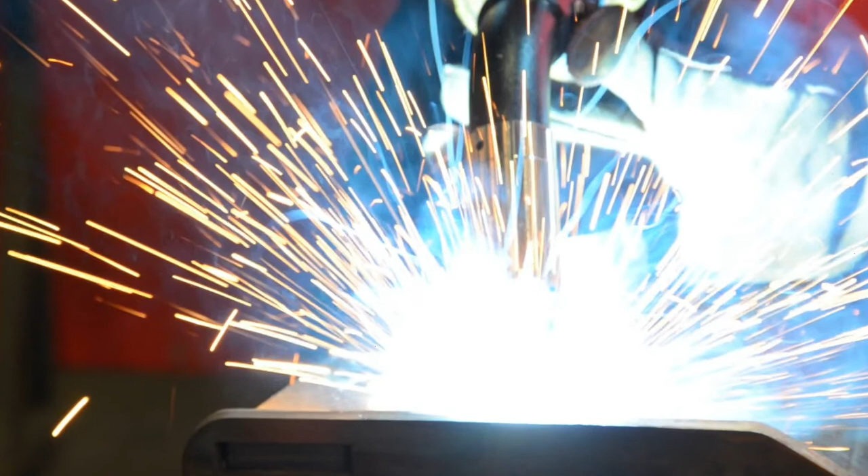Breathe Freely in Manufacturing focuses on welding because of the combination of a significant hazard and a wide range and number of people potentially exposed to the welding fume and gases.

We estimated that 190,000 workers undertake welding across the UK and Northern Ireland, ranging from those employed as welders and spending most of their time welding or preparing to weld, to those who do short amounts of welding for maintenance or repair tasks. Some will be welding mild steel, while others will weld on stainless steel or more exotic alloys with varying toxicity of the metals involved.

We'll consider these more later. The 150 cancer deaths that this document or information sheet provides may be from the more hazardous metals in the fume, or, as recent scientific evidence has now shown, exposure to general welding fume. The number is estimated from the HSE's data, and is for the UK as a whole.

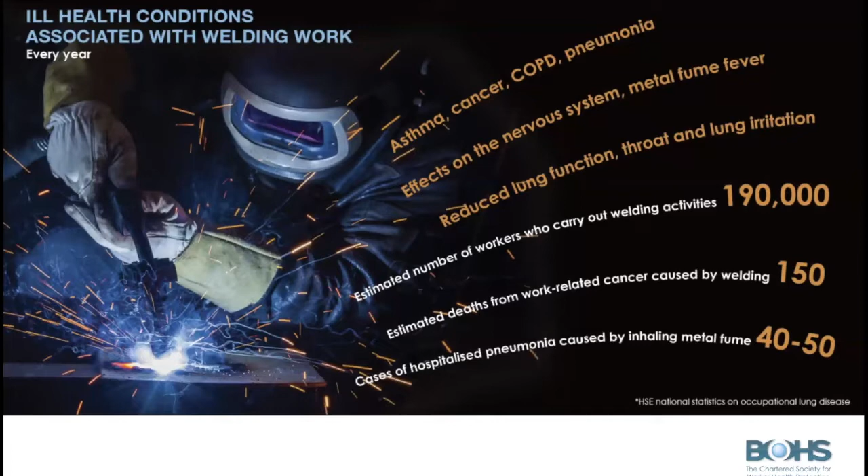The campaign was launched in May 2017 by BOHS. The Breathe Freely 2 campaign follows on from one on construction, which is also ongoing as we speak.

And also a control selector tool for welding fume, which is a microsite that we've developed to help you select the best control options. We'll take a look at that later.

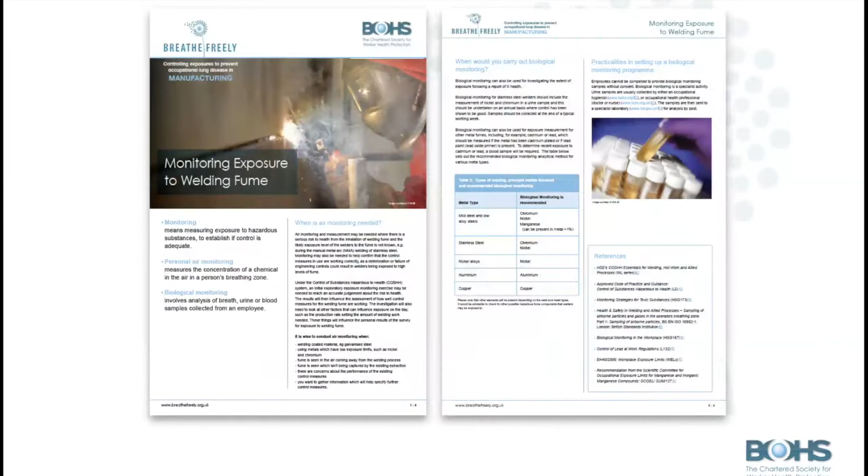Here's an example of a fact sheet, in this case explaining what exposure monitoring is and when it is needed. I'm not going to go through the detail. If you want to take a look, you are very welcome to do so.

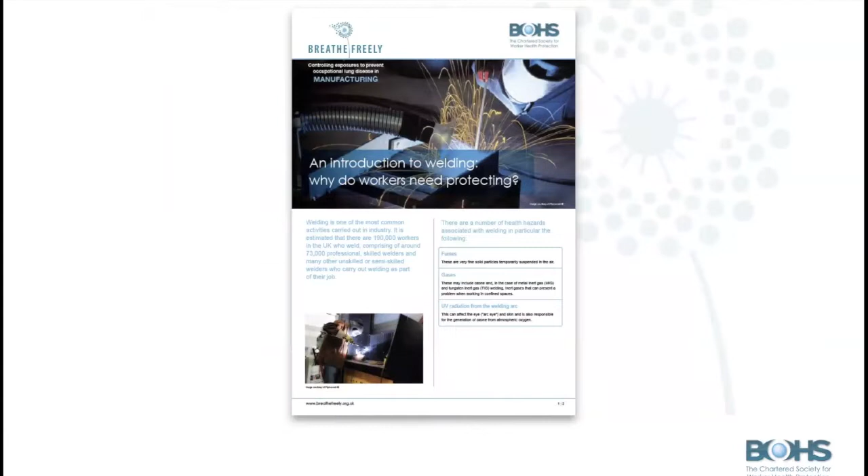And here's a briefing for duty holders, so as you can better understand the hazards and risks, and as a call to action to get you to start taking improvement actions on the welding in your businesses.

This slide takes a look at the likely and most significant components of the welding fume from various welding activities, which may come from the base metal or from the welding rod or the wire. The next slide shows us those of greatest concern.

As you can see down the left-hand side here, we've got different types of materials that you might be welding on, and across the page, the brighter the colour, the more likely you will come across those particular components in the fume. So as we can see, low alloy steel, you might expect to get some chromium and some hexavalent chromium giving off.

Hexavalent chromium in particular is toxic and has a very tight exposure limit. Also, you can see near the right hand side there, manganese, which has become very important for low alloy steel. We'll talk a little bit more about that later.

This is based on the International Standards Organization's 15011, Health and Safety in Welding and Allied Processes. And these are the potential welding fume components of greatest concern based on the toxicity and the prevalence of the welding on the specified type of material.

As I said on the previous page, chromium, hexavalent chromium - chrome 6, chrome VI, as it shows on the screen there - the manganese, and potentially the nickel.

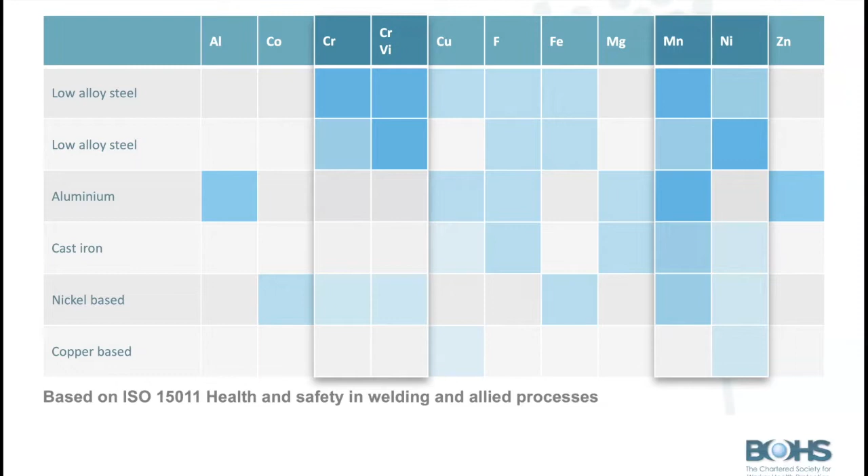The workplace exposure limits for these components are tight or very tight and are likely to be exceeded unless effective controls are implemented. Following a change to the limits in August 2018, the workplace exposure limit for manganese is now as restricted as hexavalent chromium, because it is a respirable fraction that will apply to welding fume.

This is particularly important for duty holders using metal inert gas on low alloy mild steel, because this often involves manganese in the welding consumable, the rod or the wire. Even though it may only form 1 to 2% in the consumable, manganese is more volatile and can be up to 10 times that proportion in the welding fume itself. Therefore, the tenfold reduction in the workplace exposure limit for manganese in August 2018 makes effective control of exposures much more challenging than previously for MIG on low alloy steels, in other words, mild steel in particular.

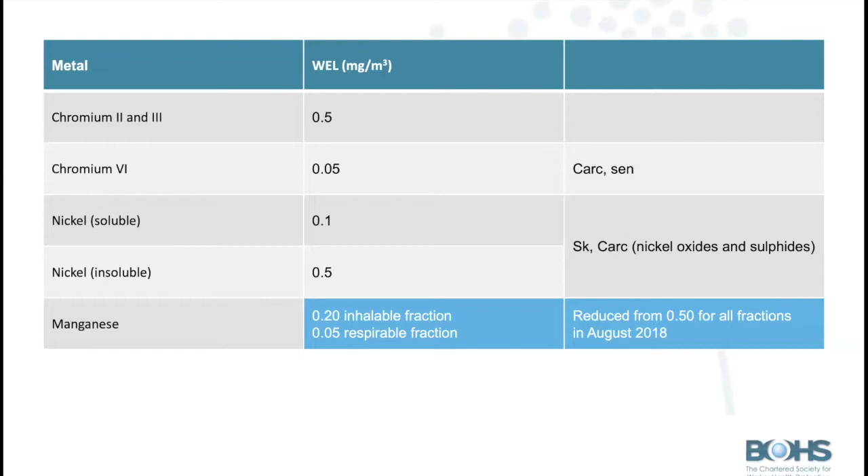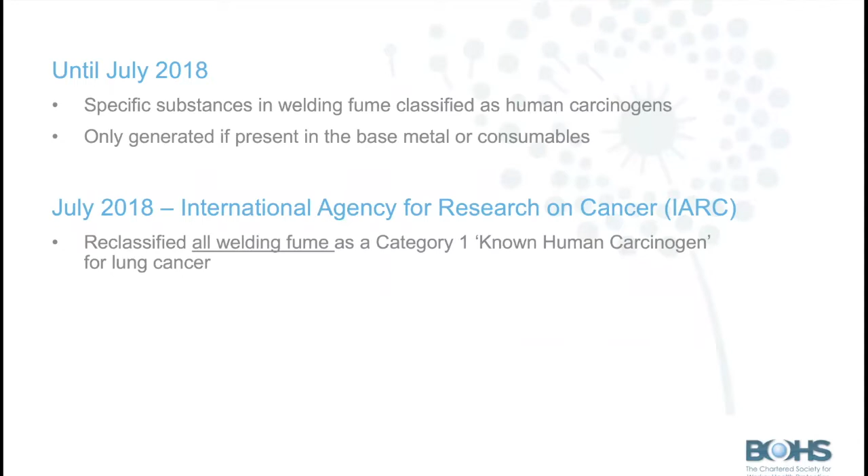But it's no longer just certain components of welding fume that are identified as carcinogens. As a result of an extensive review by the International Agency for Research on Cancer, IARC, they reclassified all welding fume as a Category 1 known human carcinogen for lung cancer in July 2018. There was also some evidence of a link to kidney cancer.

As a result of that, the HSE put out some enforcement expectations. They concluded that the risk had changed so markedly that a safety alert was justified, issued in February 2019. That alert stated that control of the cancer risk will require suitable engineering controls for all welding activities indoors, for example local exhaust ventilation, LEV, which also controls exposure to manganese in mild steel welding fume. Where LEV alone does not adequately control exposure, it should be supplemented by adequate and suitable respiratory protective equipment, RPE, to protect against the residual fume. Appropriate RPE should be provided for welding outdoors, and employers should ensure welders are suitably instructed and trained.

Regardless of duration, the HSE will no longer accept any welding undertaken without suitable exposure control measures in place, as there is no known level of safe exposure. And finally, that risk assessment should be updated accordingly.

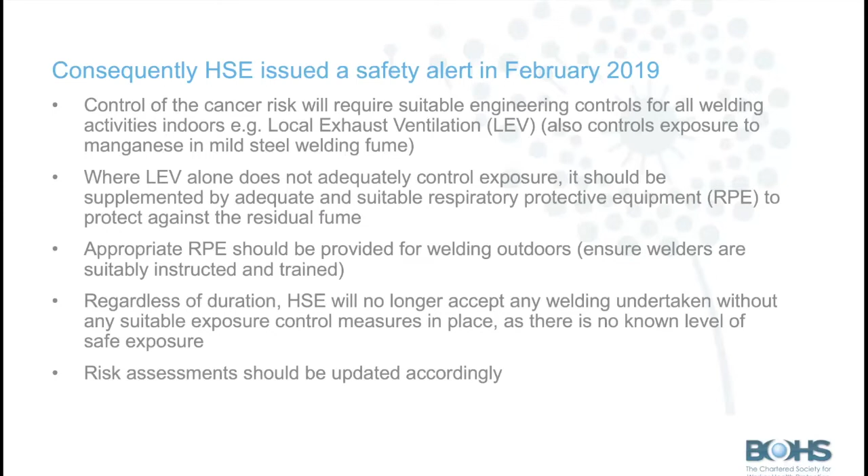This aligns with the HSE Northern Ireland enforcement expectations, which are very clear that control of the cancer risk will require suitable engineering controls for all welding activities indoors, e.g. the local exhaust ventilation we spoke about. Where LEV alone does not adequately control exposure, it should be supplemented by adequate and suitable RPE to protect against residual fume. Employers must make sure all engineering controls such as LEV are correctly used, suitably maintained, and subject to thorough examination and test where required, that suitable controls are provided for all welding activities irrelevant of duration, including welding outdoors, and ensure the correct selection and use of any RPE.

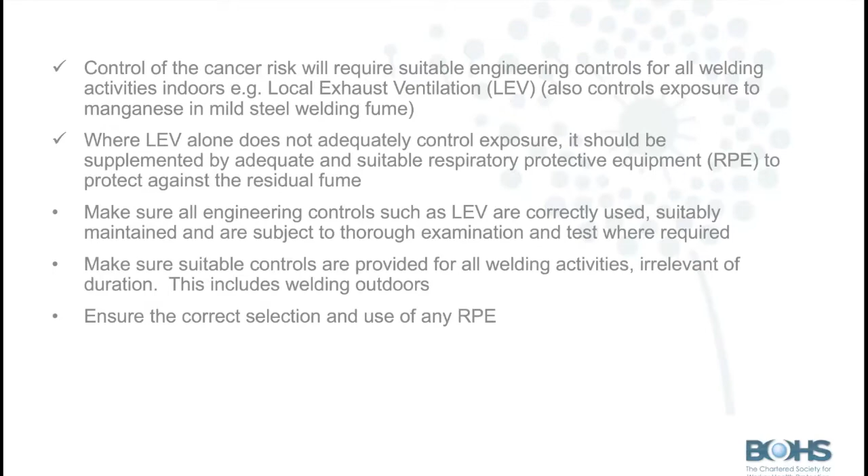So, to elimination: is it possible to eliminate the welding entirely? Perhaps you can use other joining techniques, such as glue. Even for metal-to-metal contact, that is an increasingly possible option. Or perhaps use friction welding or some other technique to join the two pieces of metal together, or design it differently so that you need less welding in the first place. That would all eliminate the need for at least some of the welding.

Is it possible to modify the process? Perhaps instead of doing it manually, you bring in a robot to do some of the welding, particularly on repetitive jobs. That might be both an improvement in productivity, but also will reduce the exposures to employees while they're doing the welding.

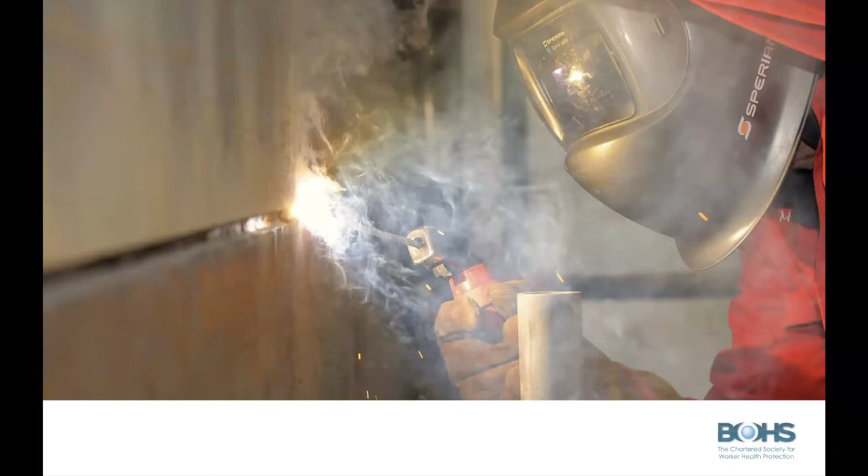This is an example of stick and manual metal arc welding showing fume generation. As you can see, plenty of fume surrounds the welding visor of the welder as the process is underway. The beauty of welding is you can see the fume when it's generated, particularly if there's a bright light, and often the bright light, the arc at the point of welding, actually provides a light that enables you to see what the fume is doing.

Of course, the quality of the weld will always constrain the range of appropriate voltages you can use, and you would certainly not want a poorer quality weld, because you'll need to do it again. There's also evidence to suggest that different welding wires result in different levels and mixes of fume, as does the wire feed rate, the shield gas used, and the pulse arrangement in the current. Unfortunately, these effects require some trial and error to assess the best options.

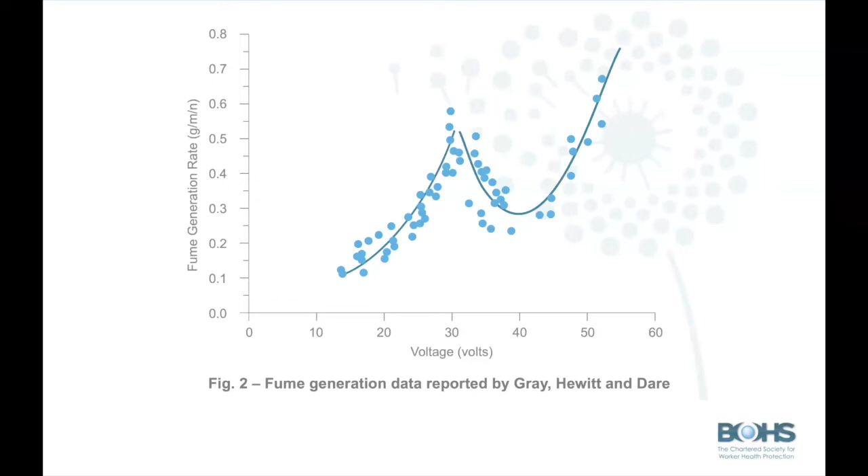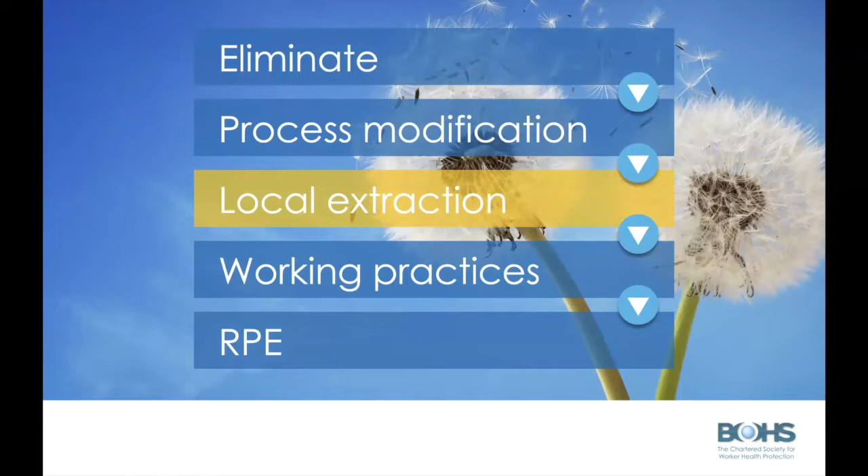What about local extraction? Well, LEV has always been an important engineering control, but following the HSE alert, it is now mandatory for any duration of welding inside, and is also appropriate for welding outside where conditions allow. The following slides provide some examples of what is possible, and occasionally an example of what really isn't working.

So it really does need to be positioned close to the welding point, and so it's drawing the fume away from the welder rather than past the welder, because otherwise it's drawing the welding fume into the breathing zone of the welder before it gets extracted. Flexible arm extraction can be effective, but it really does depend on the welder positioning it effectively and keeping it moving to make it an appropriate control.

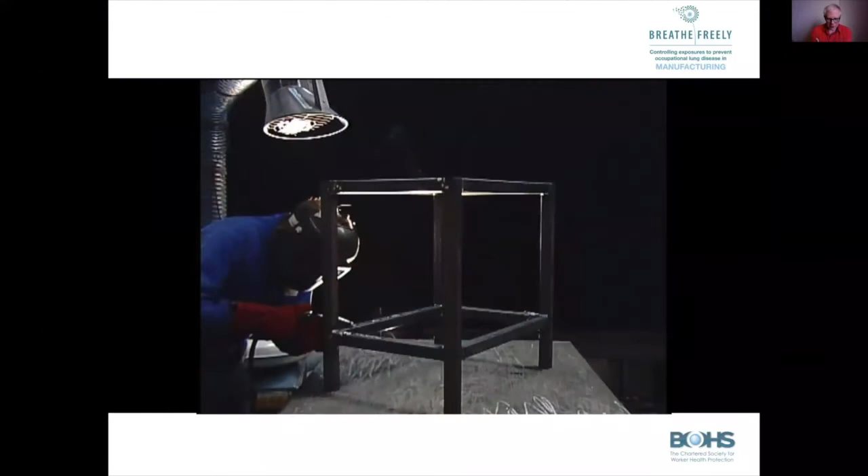We have here a video of a poorly located flexible arm extraction. It's above the welding and the fume rises towards it, and is captured, at least to a large extent. However, the welder is between the weld and the extraction, so all of the fume is drawn across the welder's breathing zone before being removed.

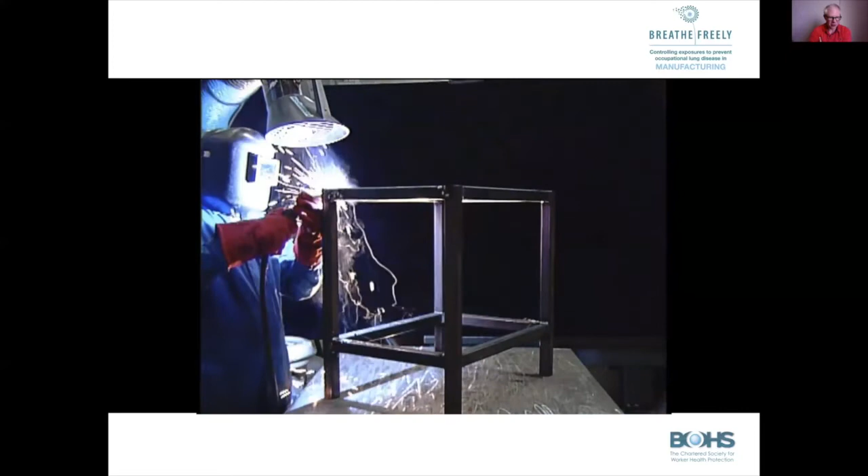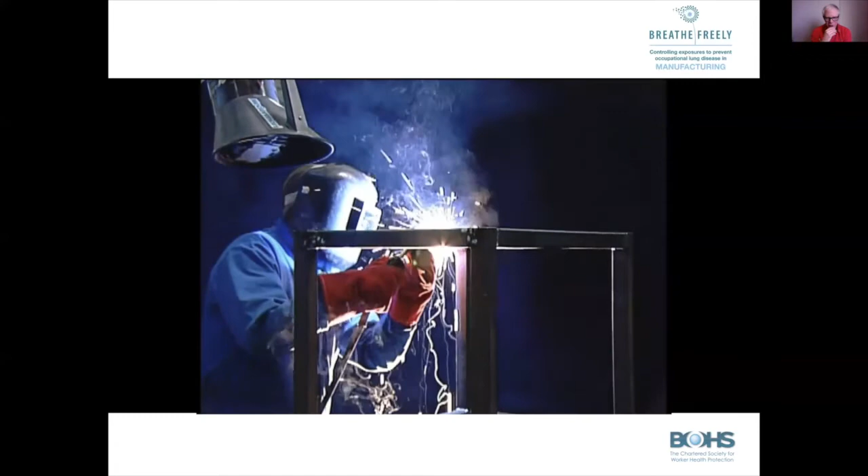When he moves to the top of the frame that is welding, the extraction system draws the fume more away from him - it's no longer between the two. As you can see, most of the fume is captured because it's both closer to the welding point and directly above. Unfortunately, when he moves to the side, he's not moved the flexible arm with him, and the fume is now pretty much spreading out into the open atmosphere in the workshop.

So as you can see, a flexible arm extraction really does depend on where you put it and where you put yourself when using it to be effective. Remember, it needs to be close to the welding point, above the welding point so as the fume rises it captures it more readily, or just behind it, and certainly without the welder between the welding point and the extraction system.

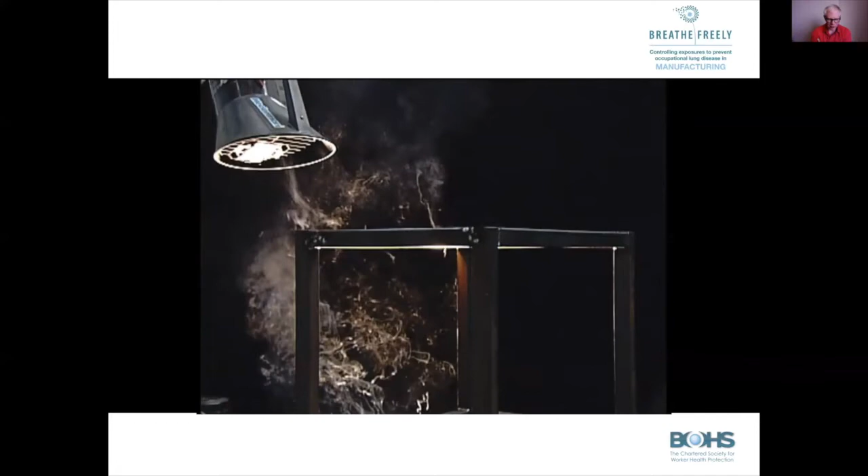Here we have a bench or booth type extraction with the welding fume drawn, as you can clearly see, to the back of the bench away from the welder. This requires sufficient air movement from the extraction to capture the fume, because the fume really wants to rise up and is being drawn back by the extraction system. But if you've got that right, this is a very effective way of doing welding fume capture.

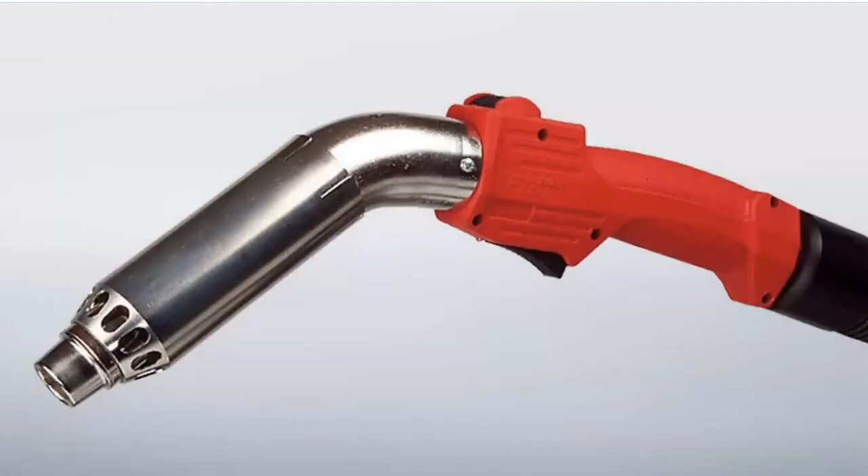Of course, given the size of the booth or bench, it can really only be used for small to medium-sized components in most cases. Recently, there have been a lot of developments in on-torch extraction. You may have tried them in the past and found them very clunky, very large, ergonomically of poor design. Pleased to say that over the past few years there have been some really good developments in this area. There are still poor ones out there, but there are some very good ones too - well worth trying if this is the best option for your situation.

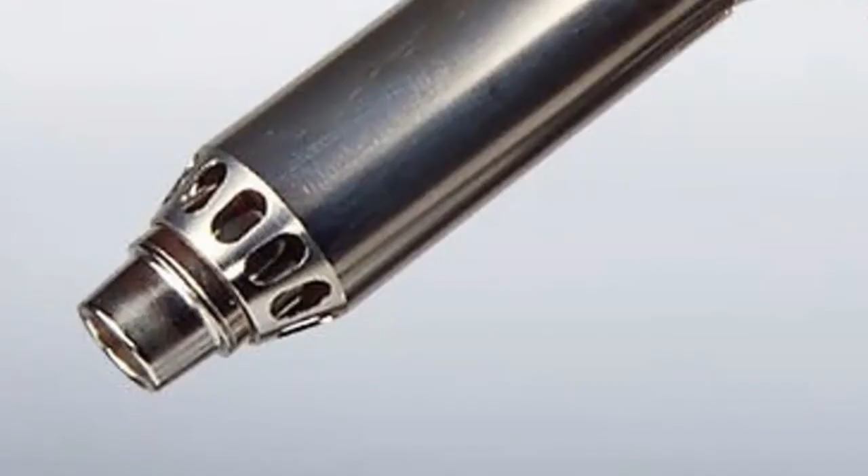So this is an example of an on-torch extraction design with the nozzles close to the welding point to draw away the fume before it escapes into the general workshop. Care is required to set up the welding gas flow rate and the extraction rate so weld quality is not affected. If set up properly, they're very effective at capturing fume and don't affect weld quality, but you need to set it up carefully. You also need to be careful in corners because sometimes that can draw the gas away a little more aggressively.

Often they'll have a little switch, as you can see on the top here, that allows you to open the gate up a little bit to reduce the flow before you then close it up as you move away from the corner. If set up correctly, and usually the suppliers of these bits of equipment will be more than happy to help you set it up, they can be very effective at reducing welding fume. They're not perfect, but they're good.

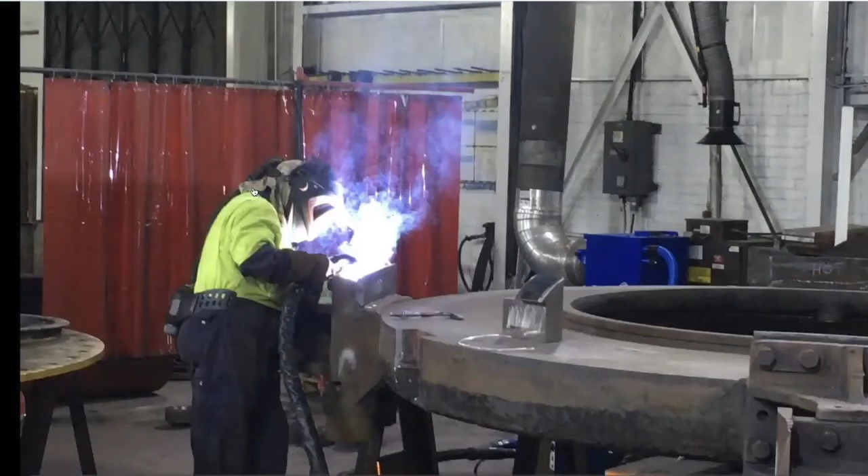Here we have an example of some welding. It's a video showing welding with the on-torch extraction turned off. You can see the substantial welding fume floating upwards, as you would expect, into the general workshop area. Clearly, no control at all since the extraction is turned off.

But you can see a big difference if we then take a look at the extraction turned on. There's much reduced welding fume both above the welding and around the arc. You can actually see the arc much more clearly in that case and the sparks coming out of it. The welding fume is much more effectively controlled in that situation and very little was escaping.

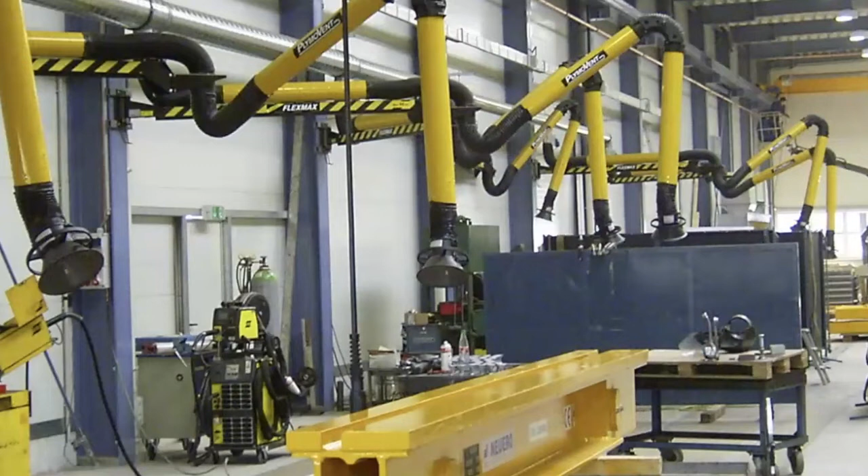We have here an example of a welding shop. I must admit it's not a typical example of a welding shop. It's a very clean one, and I know from past experience that welding shops aren't always quite this pristine in the way they're set up, but nevertheless, you can see there are multiple flexible arm extractions all driven from a central system. That can be very effective if you've got a lot of different welding locations around the room, or you need to put multiple flexible arms to a particular welding activity.

But remember, as before, it's a flexible arm system. Whether it's from a central system or a one-off system, it still needs to be positioned in the correct place to be effective. And remember, the correct place was away from the welder, close to the welding activity, and not drawing the welding fume across the welder.

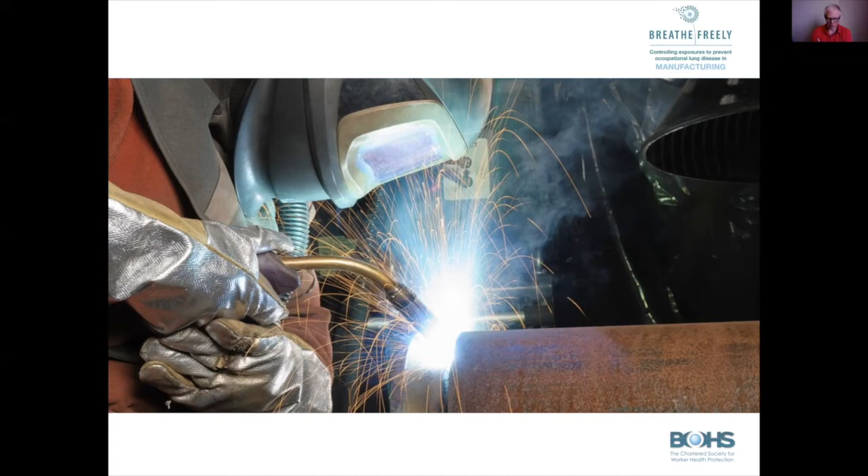So having looked at local exhaust ventilation, what about working practices? Well, working practices can involve a wide range of possible controls that will make incremental improvements. That can be down to the effective position of the LEV in informing people how to do that, and good welding technique to reduce the welding time and rework. If you've got very skilled welders, they should be able to do the weld much more quickly and they'll do it more effectively, so you don't need to go back to it as often.

Effective maintenance and cleaning of the LEV, but also of the welding equipment and of course the respiratory protective equipment if you're using it. Daily and weekly checks to see that the extraction, RPE and any other controls you've got in place are in good repair and clean.

Information, instruction and training so that the welders and others know why they have controls and of course how to use them. The proximity of non-welders, their position relative to the welding, for how long, and whether they need additional protection. That could actually include supervisors.

I've previously done some assessments in large engineering companies where they were doing a lot of welding, and the supervisors were walking around in amongst the welding most of their shift. And actually they were being exposed to a significant amount of welding fume, including the manganese we've talked about previously. So an important thing to consider is other people working in and about the welding, even if they're not welding themselves.

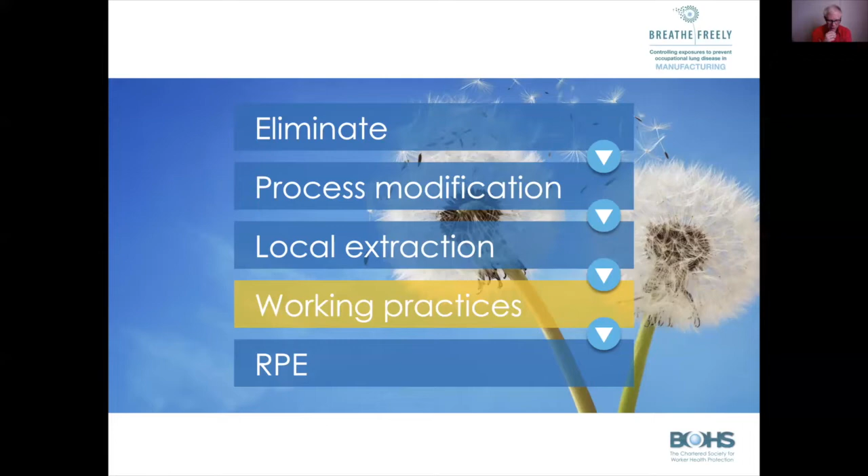Shift work or extended working, so the exposures are for longer. Is that exposing people to more welding fume? And welding in confined or restricted spaces, so general ventilation is less, and you really need to pay particular attention to all the hazards of the confined or restricted space, as well as the welding itself. Of course, you are using inert gases as well, so oxygen can be a challenge.

RPE, we know this is a least preferred option in the hierarchy. It's very dependent on the welder to use and keep it in good condition and working order. But it may be a necessary control, either if working outside, where extraction isn't reasonably practicable, or when welding inside if there's a residual risk from the more hazardous metals.

One possible need for RPE is to protect welders against manganese fume from heavy, mild steel welding on large components with complex configurations. In such cases, the most likely extraction you're going to need, and the only one that might be effective, is on-torch extraction. The video showed they were good, but they're not always able to capture all of the fume, particularly if you're working in different directions, configurations and angles. In those cases, there might be sufficient residual manganese in the welding fume to require RPE as additional protection to the welder.

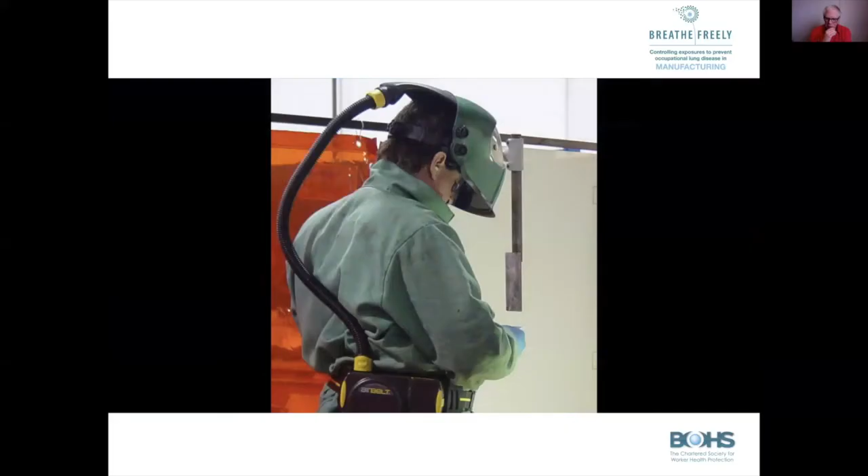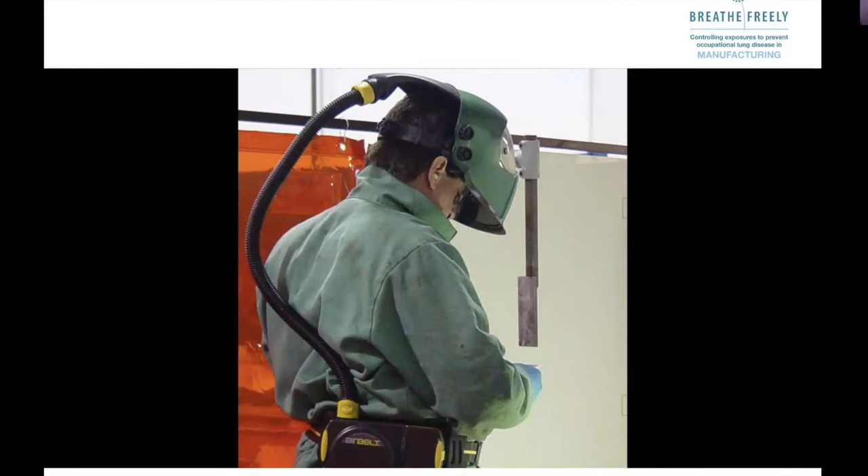A typical positive pressure welding respiratory protective equipment is integral with the welding visor, shown here as a typical example. The air is supplied from a belt-mounted filter and fan, which also provides some cooling across the welder's face. You tend to find that welders are quite keen to wear this type of equipment because it does give them a cooling effect across the face while they're doing what is a hot job.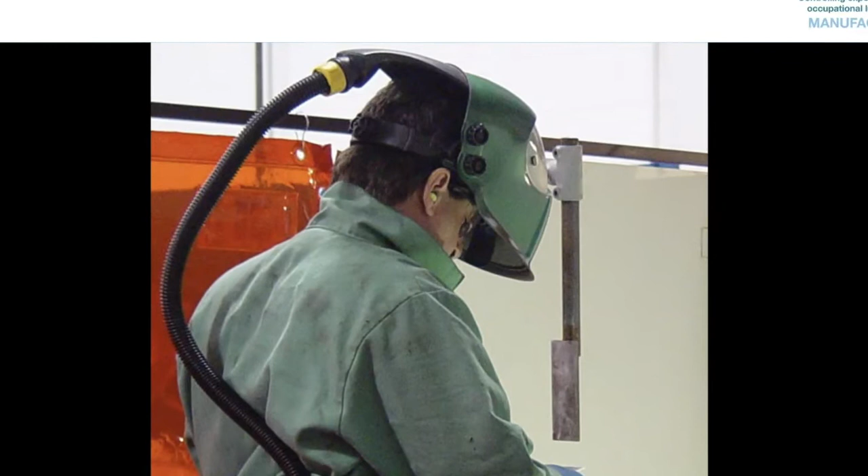Negative pressure RPE is not advised for prolonged use because it requires more effort, and it needs to be fit tested, so it's less likely to be fitted and used correctly by the welder. So both from the likelihood that the welder will want to use it because it keeps them cool, and because it's much more effective, it's better to have this positive pressure integral with a welding visor.

To help duty holders select and specify the correct extraction system for welding activity, a working group has developed a welding fume control selector tool on behalf of the British Occupational Hygiene Society. We've designed it to be simple and easy to use so that a duty holder can understand and act on the results. And it's also, I'm pleased to say, absolutely free.

Of course, you may find yourselves helping other duty holders, so let's take a look at the system, and let me first show you the best way to find it. So all I've done here is type into a search engine BOHS Welding Fume Selector Tool. The first thing that comes up is the Breathe Freely Welding Fume Control Selector Tool, which is what we need to take a look at.

Okay, let's try a live demonstration of the Breathe Freely Welding Fume Control Selector Tool. So here we are on the web page. I put in BOHS Welding Fume Control Selector Tool, and here we've got the link, so let's go to it. Straight in - as they say in the adverts, we're not shortening any of the links, so if it takes a long time we'll see that, but it shouldn't.

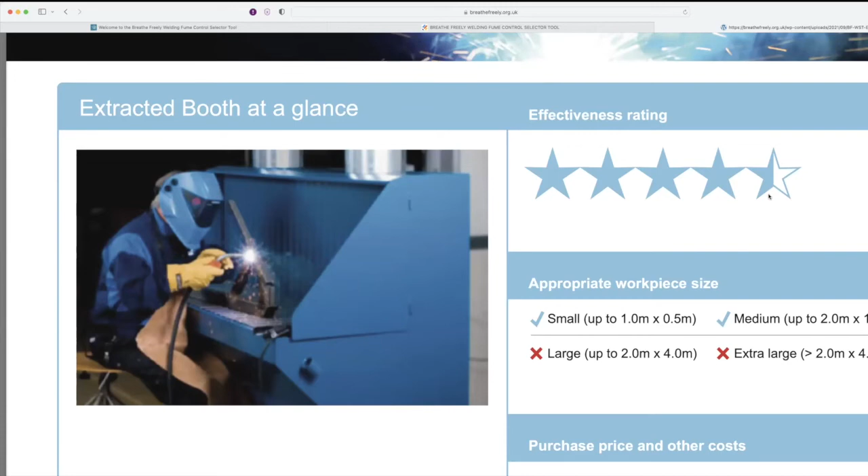It gives a sense of the size of workpiece that it's useful for, some ideas around cost and other costs and filters that you might need to apply, so you've got some sense of the costs associated with ownership. Some information here on what an extracted booth is, and what some of the benefits and occasionally the downsides are to it. Some top tips on how to use it effectively.

Some limitations. As it says here, mainly suitable for welding relatively small and flat workpieces. Some other considerations that you need to take into account, and potential alternative control solutions, because we recognise that it's not always the case that you can fit or use an extracted booth. There may be other reasons why this is not the best way forward for you, and it gives some alternative control solutions that might be appropriate in your circumstances.

So, as I hope you can see, it's a simple sheet. There's just 2 pages. You can print this off, you can download it. It also has links to go to other parts of the Breathe Freely campaign, so as you can see, other advisory texts as well.

We are trying to make this as simple as possible to pick up and work with. But if you've got any suggestions as to how to make it even better, then we are very open to those suggestions. Okay, so let's go back to the selector tool itself.

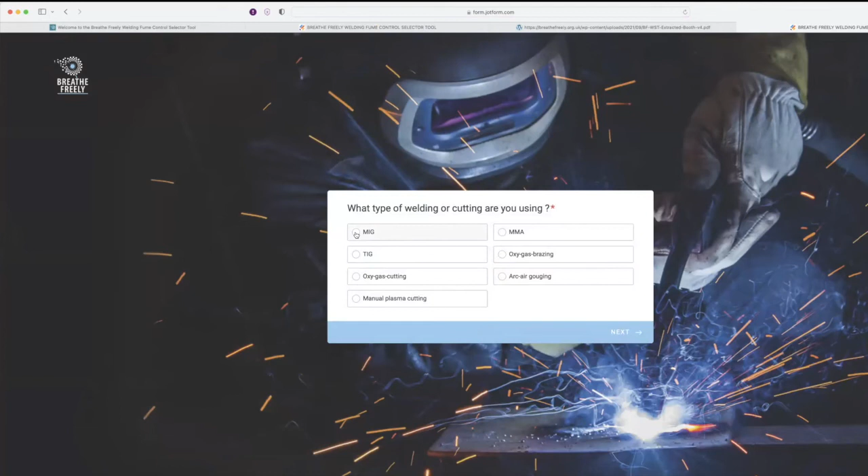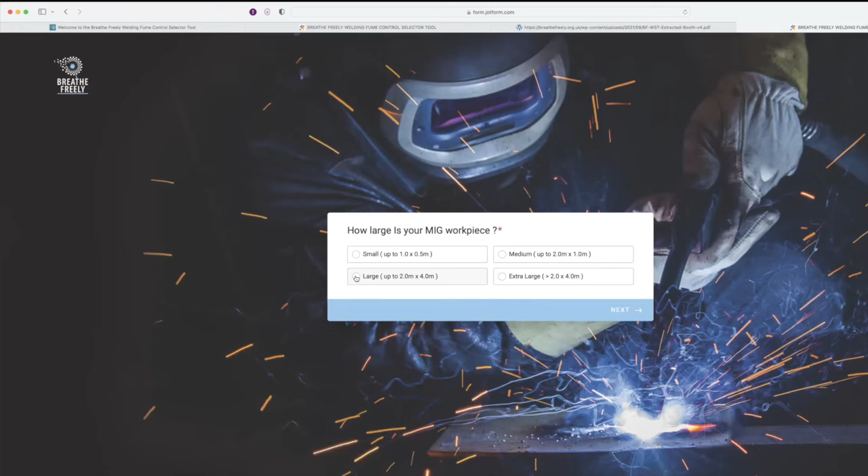Again, let's go for MIG, because that's a regular type of welding that people use. Let's go for mild steel, because again, that's the most common approach that we might use. And let's go for over an hour, because we're dealing with welders here that are doing a consistent amount of work on welding. This time though, instead of medium, let's pick a large workpiece to see what difference that makes to the advice. You'll remember from the previous advice sheet that an extracted booth was suitable really for small and medium, so large will give us an alternative option.

Okay, so the optimum control solution that is proposed for MIG welding on mild steel with a large component and duration of over an hour is an on-torch extraction, plus respiratory protective equipment, because as we know, on-torch extraction is not perfect. It can let 10%, even 20%, occasionally more than that, of the fume out, depending on exactly what the configuration of the welding and of the components. However, it is effective at taking at least some of the welding fume away.

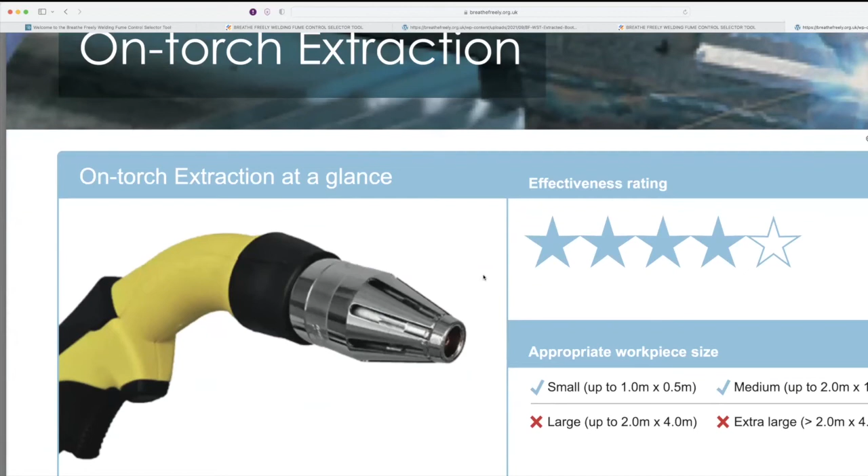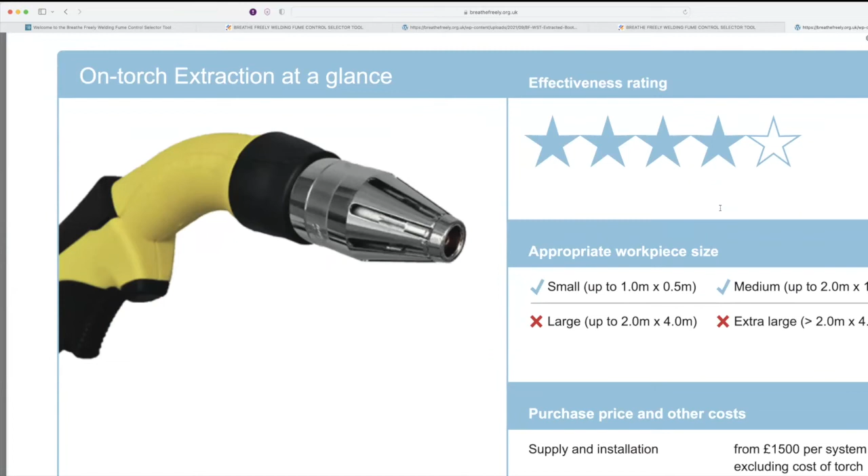Again, we can have a look at the on-torch extraction document. It's a short document just to set out the approach. So again, a picture, an effectiveness rating. You'll see that instead of being a 4.5 star, this one's a 4 star because it does rely a little bit more on the welder using it correctly, although it is still something that is inherently able to do the extraction effectively. It talks here about small and medium, but it can be large and extra large as well. Supply and installation and other costs and filters.

On-torch extraction, a little bit of a description here as to what it is. Some top tips on how to use it effectively, again, as we had before. Some limitations. Generally only suitable for MIG and MAG welding torches, and it needs to be located close to the welding area, as it says. Some research information and some other considerations to take account of.

And finally, some alternative control solutions here. So extracted booth is suitable for small and medium. A flexible arm can be used, but is less likely to be as effective. So some examples there of other information that can help you to implement this effectively.

And if you want to go back and take a look at another one, you can relaunch the tool. You can download the data sheets, click on the respiratory protection advice, and also go take a look at the Breathe Freely website itself.

Welcome back to the presentation part of this. So we've come out of the web pages and we're now going to take a quick look at the team of volunteers that helped create the Welding Fume Control Selector Tool.

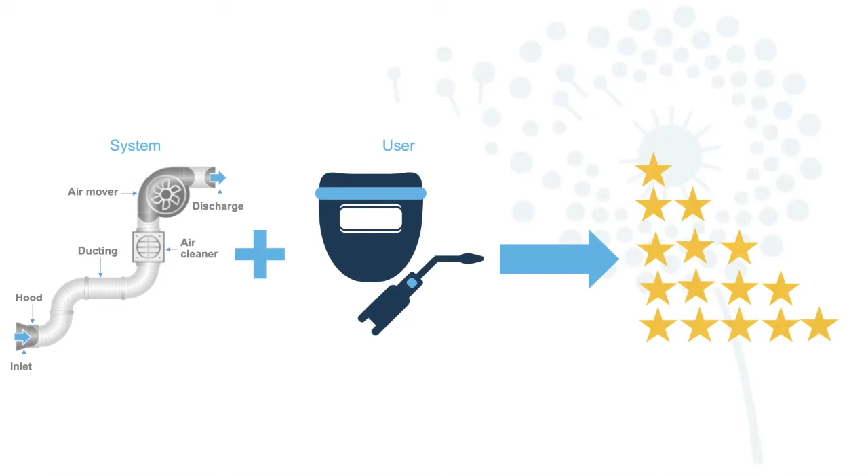What type of metal is it? What size is the workpiece, and how long will the welding take?

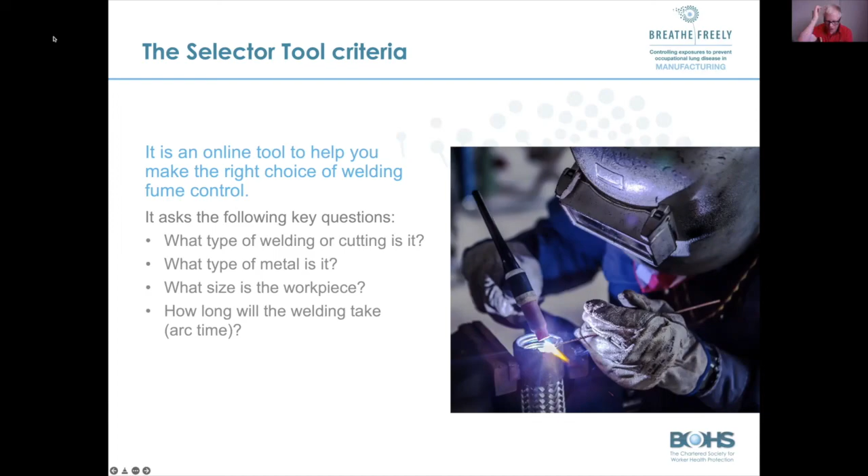The tool leads you through those and takes you to a data sheet which you can print off or view on the screen. The selector tool provides advice on the best available control solution for the task criteria selected by you, the user. It also provides links to other suitable alternative fume control solutions, as it's recognized that for one-off jobs, it may not always be possible to have the optimum control solution available.

And with every fume control solution, there are limitations to its use and its ability to adequately capture fume, which are addressed on each of the control sheets, as we saw. Our intent was to develop a tool that was simple to use, but not simplistic in the information it provides, so that it's useful for you, the duty holder.

I'm pleased to say that the selector tool has, as we said previously, been endorsed by the HSE and the HSE NI, and duty holders are frequently directed to it by them, and indeed by this video now.

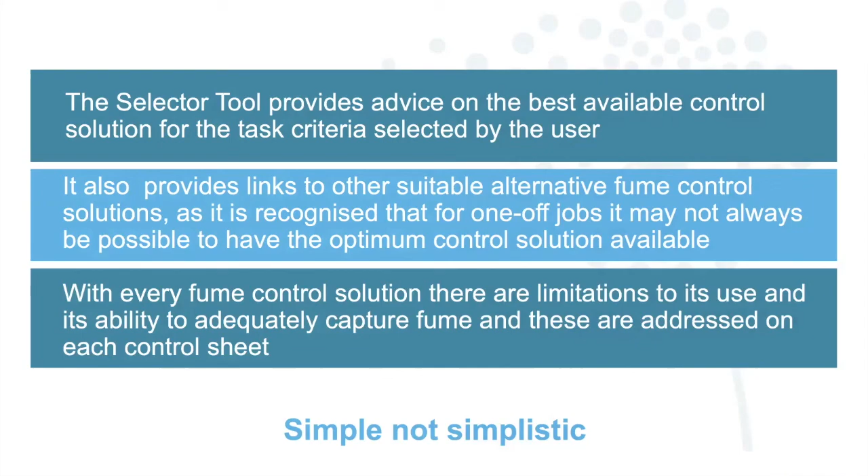Do please feel free to go and have a look at it. You can use it on a mobile phone, on a computer, and you should be able to use it on a tablet as well. It should work across all different systems, and it is free to use, as I've said before.

Just like to remind you that this presentation is on behalf of the HSE Northern Ireland, but also shows you what the Breathe Freely campaign by BOHS is trying to do. It's trying to improve worker control of exposure to substances that could cause occupational ill health, particularly for the lungs.

So please do go take a look at breathefreely.org.uk and see what other information is there that might be useful to you. Thank you very much for your time and for watching this video. If you've got any further questions, please contact HSE NI via their website, via email, or the telephone number. Thank you.